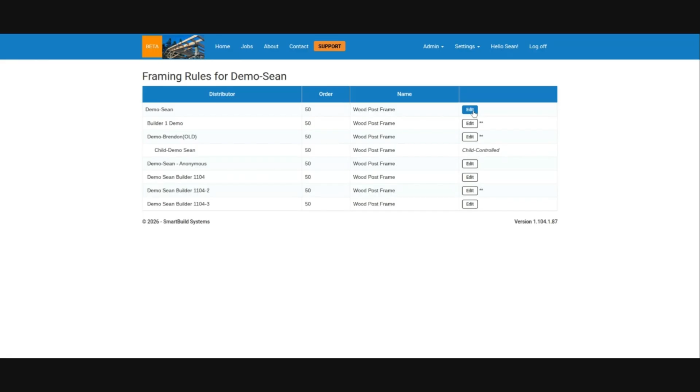In the meantime, we've also been doing quite a bit of changes on the software. I'm going to share my screen, and we are going to get into the new things that you'll be seeing. The first thing I'm going to do is jump into the framing rules. As usual, there is some setup that needs to be taken care of to take advantage of some of these things. In general, we try not to change things on you. If we add new things, you're going to have to opt into them for the most part. That is true of some new materials that we'll talk about as we get into a job.

But if you do want to take advantage of some of these things, you will have to come in and make some changes to your framing rules in the setup wizard. And if you need help with that, that's what our support is for. So just let us know.

One thing I did want to point out in the framing rules here, as we get into a job, you might have seen mentioned in the release notes that we've changed quite a bit with the attached buildings for porches, lean-tos and any sort of attached buildings. One of the things we've done is you can now have a different set of properties, materials and settings for the attached buildings that are different from your main building. We're going to get into a job, and it'll make more sense as we get into it.

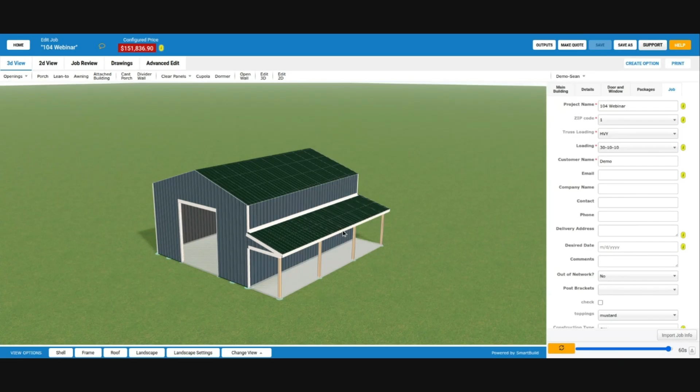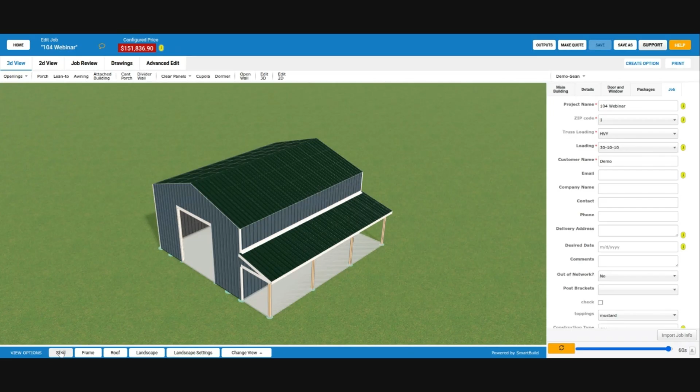So yeah, new functionality there. I'm going to run through a couple things here on the main building, and we're going to spend the bulk of our time looking at these new attached buildings and the porches. But a couple things I wanted to point out. Some of you may want to use this - it probably applies more to porches, but it's a little bit easier to show here.

You can now have gable trusses even if you're using rafters, so you can use a combination of gable trusses with rafters. I have trusses right now, as you can see, but if I switch over to the rafters, you'll see that it's going to switch my roof framing to rafters, and I have gable trusses. If you want to do this, there's just a checkbox here to actually get the gable trusses to stick around. So instead of the end rafters, which we also have, you can turn that on and use gables.

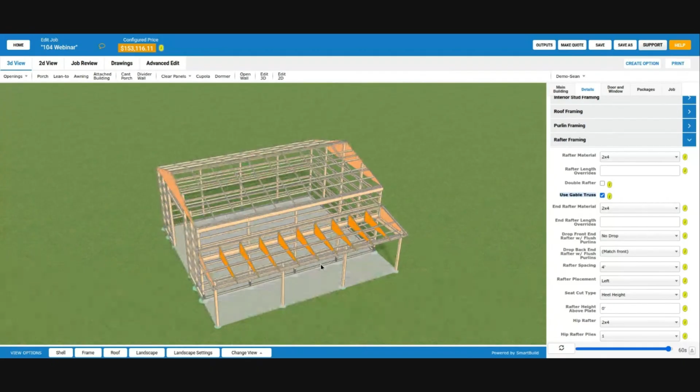Maybe more likely on the porches - so you can use rafters for your porches, though you could have these gable trusses on the ends. That is a setting you could have specifically for your attached buildings. In this case, I have that on my main building at this point. I'm going to switch this back. So just something to keep in mind, a new feature.

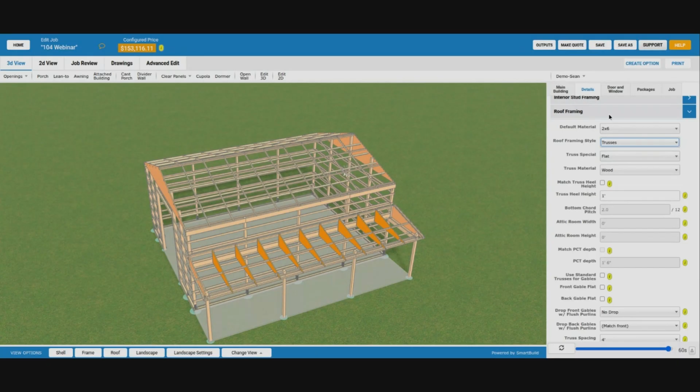Another thing I'll point out here on this main building is we've added an additional ledger. So we have the top ledger for porches, and now we also have a lower ledger. These are going to show up at the top and the bottom here. I do have these turned on. Anytime you have a porch coming up against a wall, or a mono truss porch, you have the ability to have this upper ledger, which we've already had, and now a lower ledger, which you can kind of see here - it's this one right here. That's going to be down here in some of this framing roof ledgers.

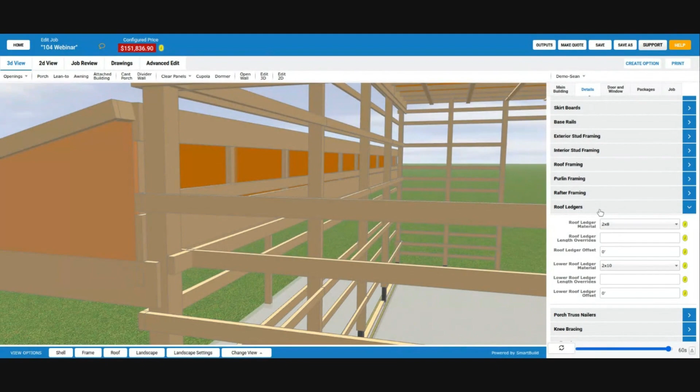We've switched things around a little bit here. We had some of this in the rafter framing. We do still have a bond plate - up here at the top you can have both a kind of header, or we're calling it a ledger, and you can also have a bond plate. So you can have two pieces up here at the top. The bond plate, the rafter bond plate, is still here underneath the rafter settings, and that's only available with rafters.

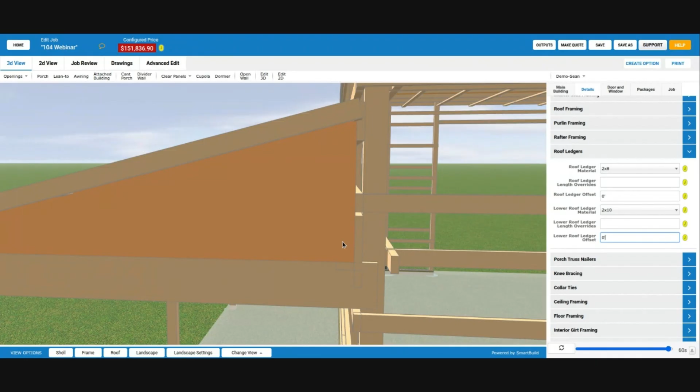But with trusses, there's a new section here of roof ledgers, and the roof ledger is going to be the upper - that's the 2x8 that you see here. Then we've added in this lower roof ledger - I have a 2x10 here. You can shift that; there's an offset. I have this at 0 at the bottom, so it's going to place it flush, I guess, with the bottom chord. Then it's going to place it up at the top here with the peak of that mono truss. You can shift those if you want, using this offset to move them up and down.

So new material, if you want to use that again, you'll have to go into the framing rules. It's going to be set up as none - you're not going to see any changes here unless you go in and add in some materials like I did. I went into my framing rules and added those materials, and then came into this job and added that in.

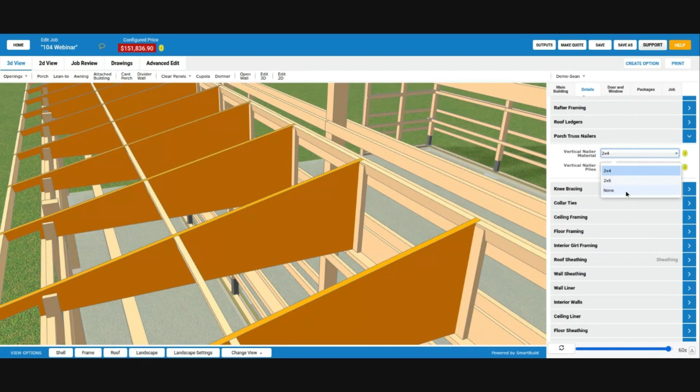Probably keep that set. In the same area, another new thing we've added is a new group called porch truss nailers, and the actual material is a vertical nailer material. So I have a 2x4 and 2x6. Again, this is going to come in as none, but that is going to be these parts right here.

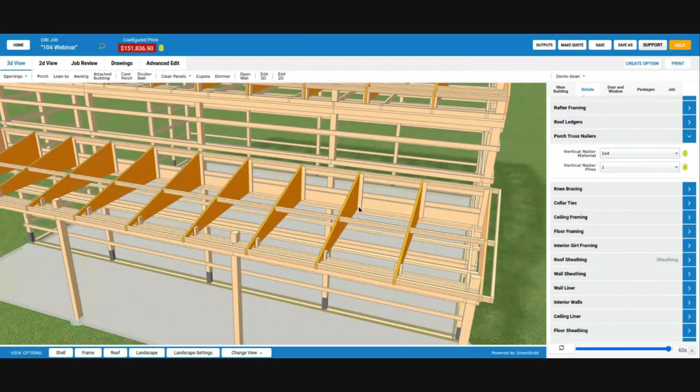Those are going to show up if you have this set to a material up against the truss here, in a porch situation like this, where it's meeting against another wall. This porch is up against this wall with these mono trusses. It's going to put in these nailers at the kind of tall vertical here on the inside of these. So new material, that's something you can add in here if you want, and you can put in 1, 2, or 3 plies, and that will stack coming out towards us here.

So another new material, new feature, and again, you will have to go and set those up in the framing rules. Just a little change here.

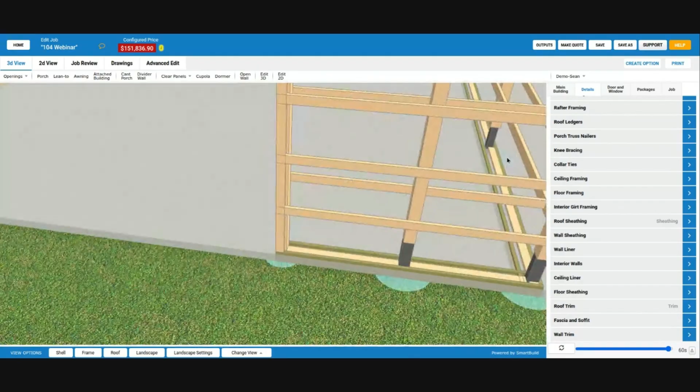This is not a new material. We've had what we call base rails, and I know some of you have been using these, and you can see those in between here. I have those turned on. I have a material in here for the base rail right here, 2x4, in between the posts. So base rails are always going to show up in between the posts.

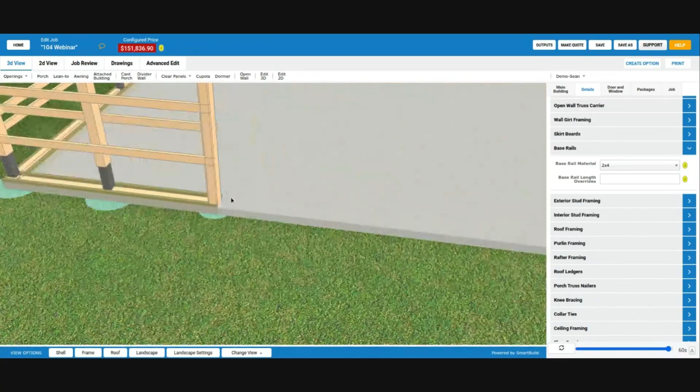The thing that we changed here is that we've removed those from overhead doors and sliders. We used to run these all the way through, but now we're just automatically getting rid of those. Hopefully that's not a problem. That's one of those things where this is just going to change on you. If you don't like that, let us know, and we can make some changes to make that an option. We decided to just remove those based on feedback that we heard. If that's a problem, let us know, but just heads up, you're no longer going to be getting the base rail if you're using those at the overhead door slider openings.

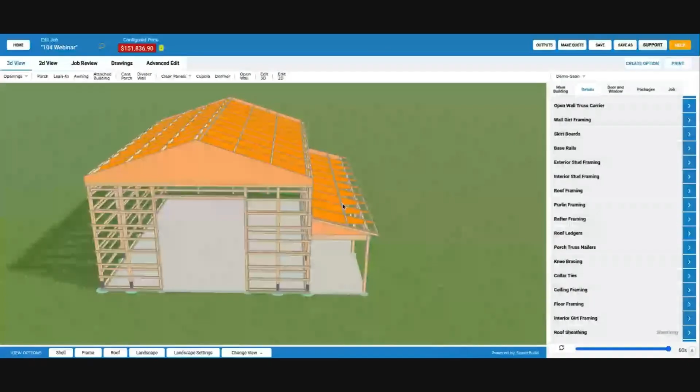I think one last change here before we get into the porches, and this one's kind of an advanced feature, but I did want to just point this out. I'm not going to get too deeply into this because we could probably spend an entire webinar on this.

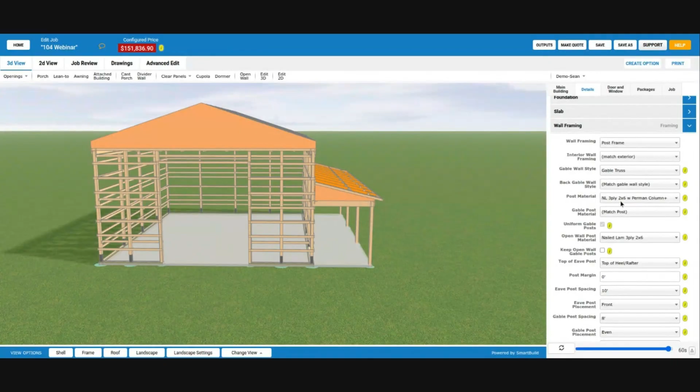And that is getting into a change with the assemblies, post assemblies. We have a whole other video on that. We can also set up a support session where we can walk you through how to set up assemblies. I do have an assembly set up for my posts. This plus here indicates that this is an assembly. And you can see I have a perma column, a 3-ply 2x6 with a perma column, and I do have this perma column showing up here in the 3D model.

And this is coming from a post assembly where you can do things like this. You can have a lower post, you can have an upper post. You can set up pretty much anything that you need for this post, from the connection with the roof all the way down to the connection to the earth and everything in between with the assemblies.

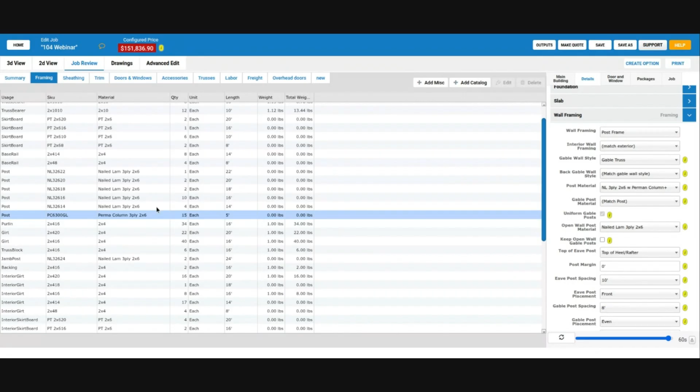And when I apply this post assembly, it applies the post. It also applies any other parts that I have associated with that post assembly. So here's a specific permacolumn type product that I'm calling out here that's coming along with it. And then any sort of accessories, and you can get into the foundations like the post base. This is all coming. I have some clips and some hold downs and things that are coming from this one assembly. So these are nice because you can set the post material to an assembly, and then all of this stuff comes along with it.

And you can set those up in the setup wizard, and again, we can help you set that up. And the other thing that you can do with these is you can run these through your span tables to where, based on span tables, it can pick specific assemblies. And those assemblies can also have different types of post base or different things that come in.

Based on the assembly, the assembly can also set up conditions to where I use this post base in this condition, and I use this other post base in this other condition. So it's kind of a complicated advanced feature. We can help you get these set up. It probably sounds a little confusing if you're not familiar with them. But for those of you using them, and if you do want to use these, one change that we've done here, and we're going to do some more work on these, is...

When you use these assemblies, you can set up your foundations as part of the assemblies, and then it just kind of ignores your foundation that you have for the job, and you get the foundation that you have set up specifically for the assembly.

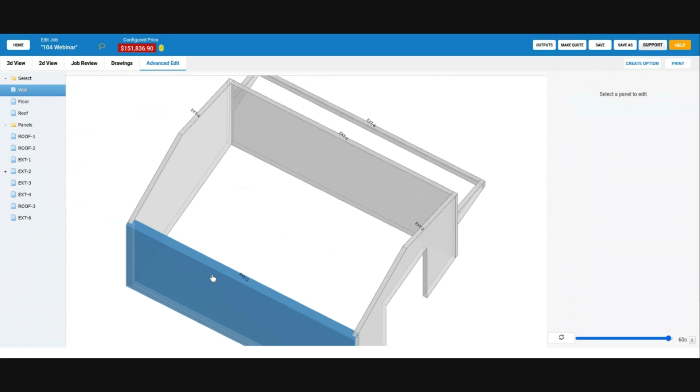For like an individual wall, for this particular wall, we'll say EXT3, I can come in here and go into that same foundation question. And for this wall, and you could also do this for the opening for like the jamb post, I'm going to change the answer to this question to a 16-inch cookie.

So this could be any of these different settings that you have here. This is just an example with the post base. And when I change that for just this one wall, it is now going to honor that. Before it wasn't honoring that for advanced edit. So now you can go into individual openings, you can go into individual walls, and make changes to these types of questions that are set up as conditions.

And now if we go into our job review... oh yeah, I'm in the right place here, but I clicked on that, so I'm going to go back here. So we still have our same post, we still have our permacolumn lower post, but then here in the post base, now we end up with 3 of these 16-inch cookies, or concrete post cookies. So that's the new thing, you can get into there and dig into individual walls through advanced edit, and it will honor those to give you the right things.

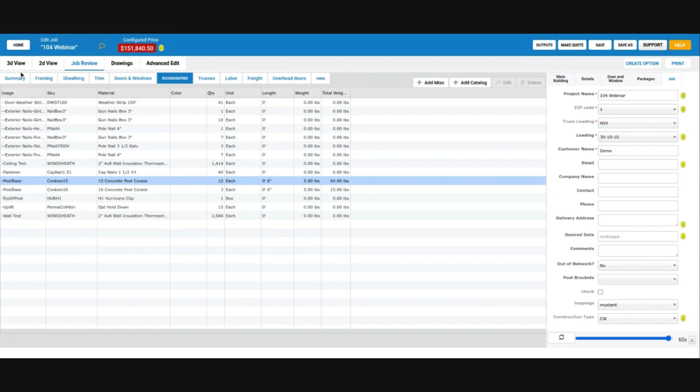And that again can also run through your span tables, and we can help you get those set up. That's pretty advanced right now, but those can be really powerful tools. We're going to continue to do some work on those coming up in the near future, but for now, that's where we're at with those.

Okay, now we're going to get into the bulk of the new things here with the porches. There's quite a bit going on here with this release, so I'm running through this pretty quickly. At the end of this, we'll open it up for questions. If you do have questions, we can get into more details, and we'll record this and post this, and also you can use our support line and we can help you set this up.

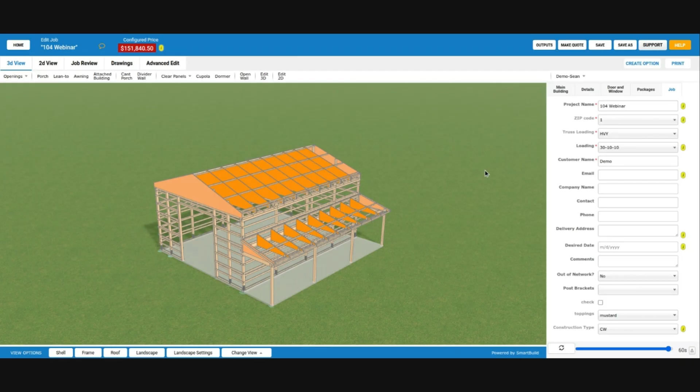Okay, so with these attached buildings, you're going to see these same buttons show up here, but there are quite a few changes related to this. So if I click on this porch, what you're used to seeing is it's going to pop up the input dialog for the porch, and you can go in and change things. If you read this, it's going to say click a wall to add a new porch.

And so the way that you initiate this command now is that you pick the wall that you want to use, or where you want to place this porch. So if we want to place it over here, it's going to get highlighted. And if I click on that, then we get our input dialog here. So that's going to be a change. That's going to look different, but there's some advantages to this. One, you can see we get a highlight here.

So you are going to see quite a bit of what you're actually changing here as you input it. I'll get into this gear here in a second. But one thing that is going to change as well is the way that these things are aligned is different.

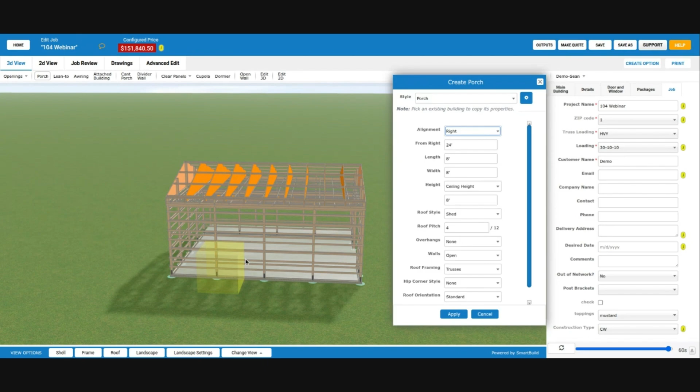Before, our default, and this isn't going to change in a sense, is left and 8 foot, just like this. But if you pull down this alignment, you can now input this based on from the left side of this wall or from the right side of this wall. And when I do right, you'll notice it says from right 24. It's not going to move the building on us in this case, but it is 24 feet from the right now.

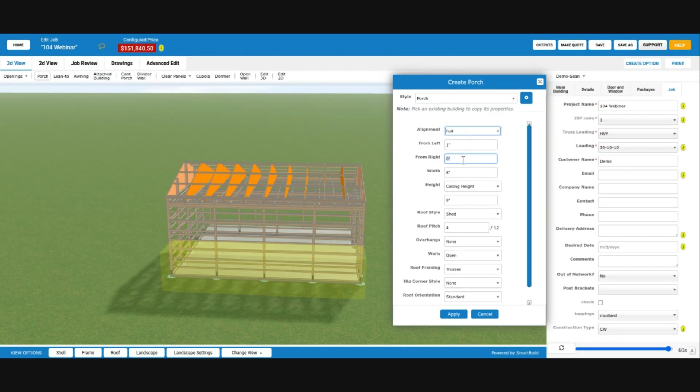You can also center this. Center will put you right in the center, so from center 0, and it's going to go 8 foot out from the center. And you can also do full. If you click on full, it automatically says 0 and 0 to give you a full length. And what's kind of nice about this, you can do like 1 foot from the left or 1 foot from the right, and that will pull it in 1 foot from the left and 1 foot from the right. Or if you do the 0 and the 0, that will give you that full length.

So that is a change, that's something that's going to be different. And like when we looked at those framing rules, there are going to be some different properties. Actually, when you open this up on Monday morning, everything's going to be the same outside of you have to click on the wall and this alignment. And some of it's going to be the same because these are just specific to attached buildings. So these you'll be used to seeing the height and the roof style and the roof pitch and the overhangs, all these things.

When you click on this advanced option, that's when you open this up, and I've already changed these like I showed you in the framing rules. So these are different for me. I've set these up the way that I want them, and I have the settings that I want to have available.

So we can start turning on things like ceiling here, specifically for this attached building. As we're changing these, this is for this attached building here, not the main building.

One really important point, something that's going to be different: anything that's in this attached building dialog, any of these settings you're setting here, are now going to be controlled by this porch. They're not going to be controlled by the main building.

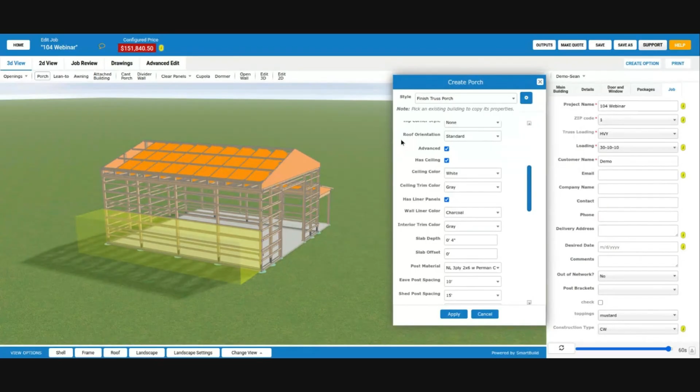A couple other things I wanted to point out. There's a note here that says pick an existing building to copy its properties.

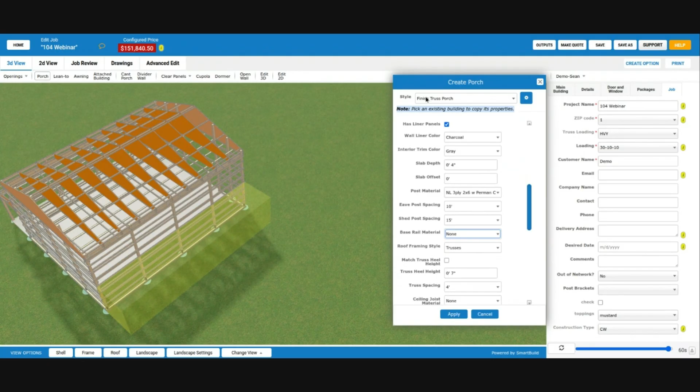At this stage, you don't necessarily have to use a style at all. You can just change any of these settings and hit apply, and whatever you set in here, it's just going to apply those. It doesn't have to be a style. Even if you're under a style, if you make changes and hit apply, it's going to apply whatever changes you have in here.

But the other kind of cool feature is if you have an existing porch with settings you want for this side, like the same thing on both sides, you can click on that existing porch and it's just going to use those same settings. You might notice it changed the ceiling height to 9 foot, so all the settings from this porch got applied over here. Even though I have a style, we could change to another style and it would change all these settings again, but right now it's using the settings I just clicked on.

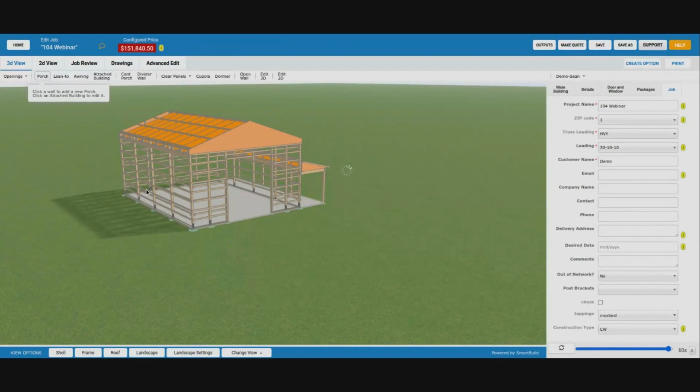If we like those, we can hit apply. So I'll hit apply, and it will actually apply this porch to that wall we clicked on. Now these two porches match exactly, except they're on different sides of the building.

One other thing I wanted to point out, since it is a bit of a change: I'm still underneath this porch command, so I can still click on a wall. The one thing we kind of lost here is the ability to do a wraparound porch easily. Before, we had quick buttons where you could click different parts on the wall, but that was actually confusing for a lot of people. Now, to do a wraparound porch, you do have to input two separate porches, but it's pretty easy because we can match the settings with this porch.

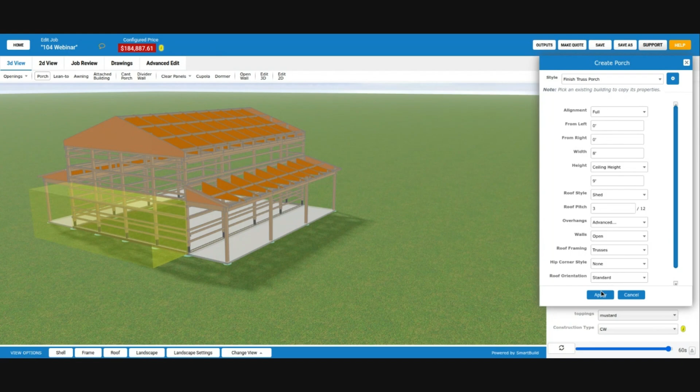I just clicked on that porch, and now these are going to line up, since that's full length and the same height, everything's the same here. If these meet at the corner, that's 0, and that was full length all the way to the end, and it's going to be the same thing over here. So we should get a wraparound on both sides now, and now we do get those wraparound porches on both sides.

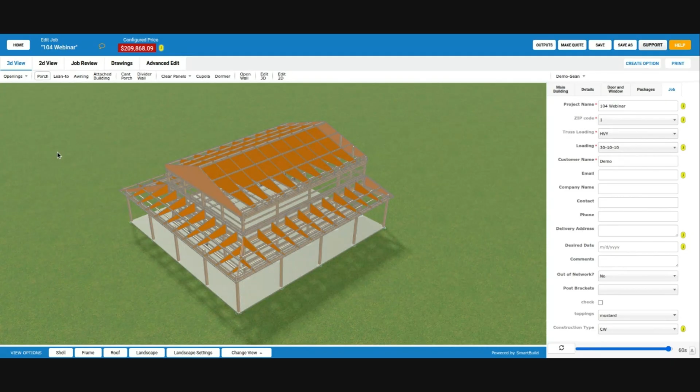Pretty easy though. You should be able to just match the properties of one porch that you put in. As long as that's starting at 0 and the other one's ending at the very end of the wall, however you do that, you should still be able to get those wraparound porches pretty easily, even though we don't have that button anymore that automatically handles it.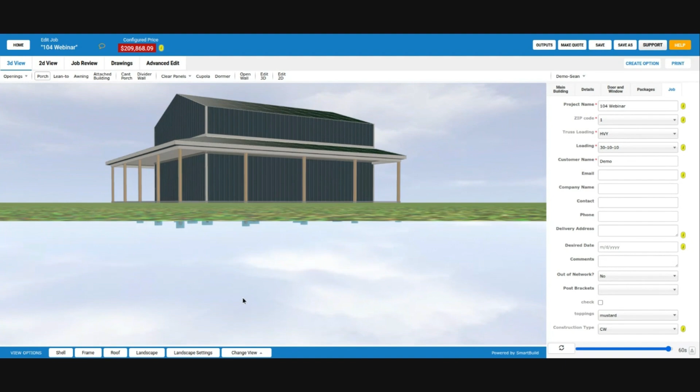Okay, I think that might be everything for the input of those. I might think of a couple other things, but I did want to point out these new parts we put in. One of those, and I'm going to get out of this now. If you hit escape, it'll take you out. Just FYI, I was still in that input method, so I hit escape, and now I don't have to worry about that.

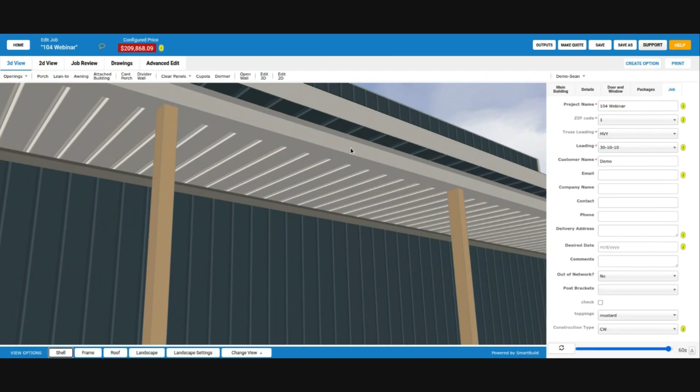Selecting walls, one of those pieces of trim we put in is beam wrap to soffit. That's a new piece of trim, and it comes into play on this front wall of this porch where I have beam wrap set up here. That was part of our settings that we looked at. There are no panels on this front part of this porch; it just runs, this beam wrap runs right into the soffit.

I had just a J channel piece set for that beam wrap to soffit trim. If you have a piece of trim in there and your beam wrap runs into your soffit with no wall type panels in between, you're going to automatically get this beam wrap trim, if it's not set to none, or beam wrap to soffit trim. So there's a piece coming in right there, and we'll go look at some drawings here in a second. It's a new piece of trim.

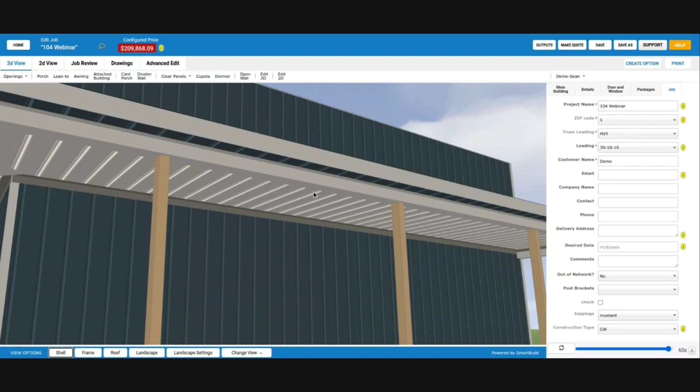If it doesn't meet up, that piece of trim is not going to be placed, even if you have a material set as part of that trim. It's going to give you that typical top of eave wall, open wall trim that we have now. But if you have a panel, it's going to give you what you typically get with the beam wrapped panel. If it's right up to that soffit, you're going to get this new piece of trim.

The other place here where we have a new piece of trim was the ceiling to wall trim. That's going to come in anywhere a ceiling meets a wall, so that's going to be all around here. Let's go into the drawings, into the ceiling layout, for a little bit easier view.

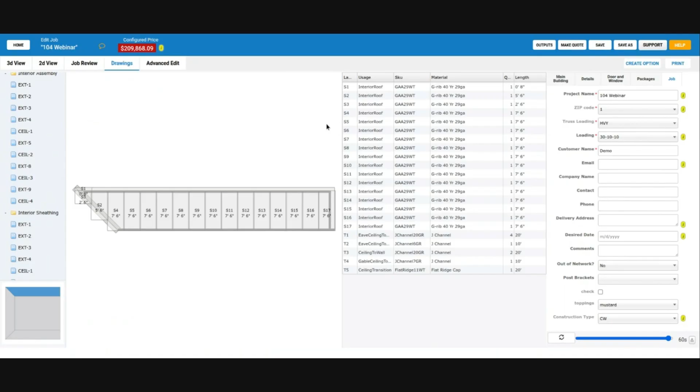Let's go into just this ceiling here, and if we look at the interior ceiling, there's the ceiling to wall trim. That's going to be oriented to this porch, up against this wall - we're looking at this from inside the building right now. So this new ceiling to wall trim comes in where this ceiling runs into that main building wall in this case, though this would also apply to any sort of porch on an attached building.

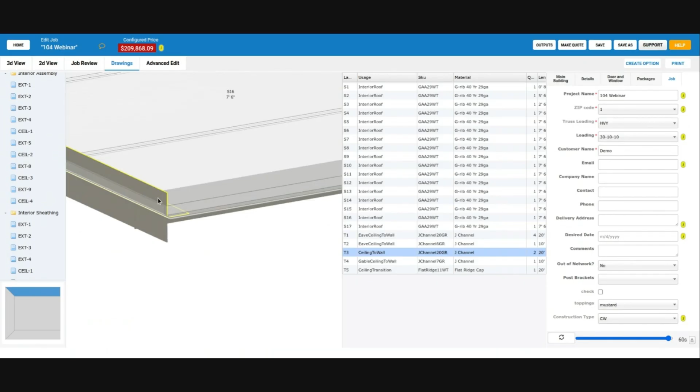You'll notice we also have this eave ceiling to wall trim - this is existing right now, you get this in this case. With this new ceiling to wall, this is an additional part here, right at the same connection. This lower one is kind of picking up the ceiling to the wall up above, and this is below - maybe this is just picking up the wall.

I think a lot of times people will use a single part here, like with the F and J, to pick these up. If you ever wanted to use two separate parts here, you now have the ability to use two different trim parts. That's basically what that gets at.

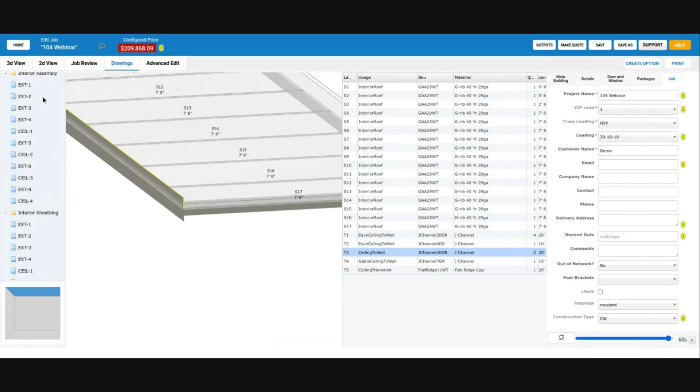This will come in set to none, this new ceiling to wall, and you're not going to see this if you don't use it. It's going to be the same as it was before. If you do want to use this, you'll have to go in there and set a material and set that up.

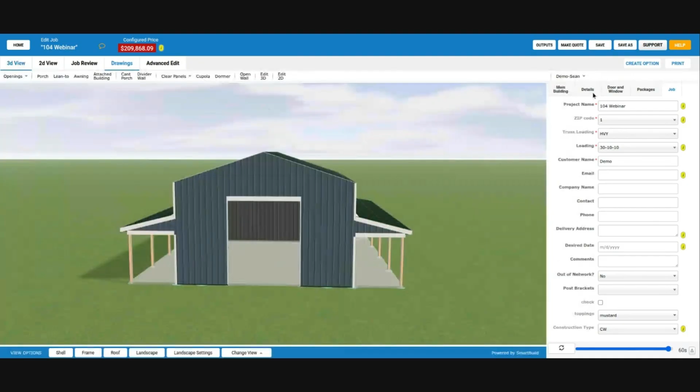This is an important thing here, and demonstrates something I mentioned earlier: this ceiling to wall trim was set up as part of this porch. So this is coming in because on that porch I selected a trim material for that and it wasn't set to none.

These same pieces of trim are going to be on your main building settings as well. So underneath these details, if we scroll down here, this is going to be part of the ceiling trim for the ceiling to wall. You'll notice this is set to none for the main building. Inside of here I also have some liner, some ceiling and wall liners, and there's not any ceiling to wall trim here.

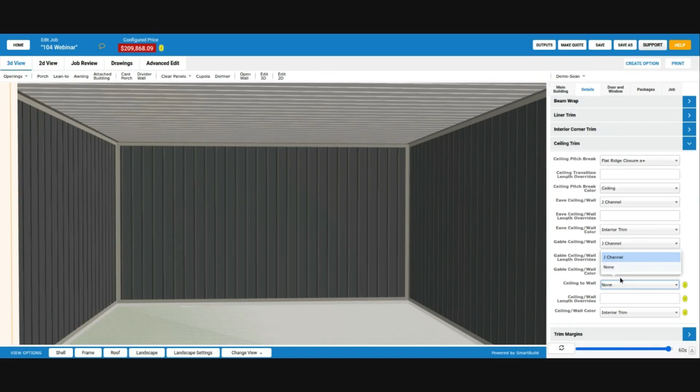If you want that to be there, you can come in here and set that to J channel. And because I have the ceiling to wall trim in my porch settings, these are completely independent - that's what I mentioned earlier, these aren't going to affect each other. So you don't have to use this ceiling to wall trim on the inside of the building, on your main building, but you can use it on part of your porch.

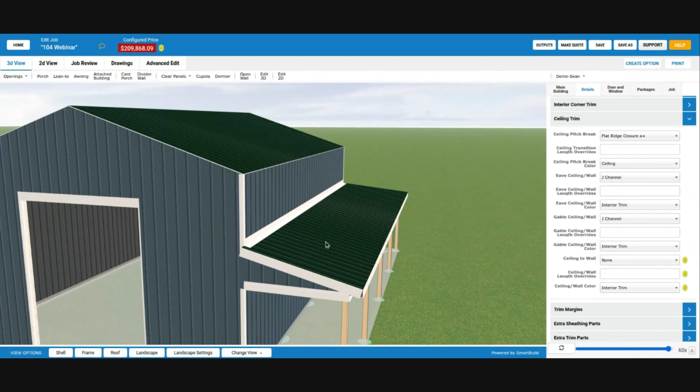If you do put in an attached gable type building - because we could put in a typical attached gable building as well - that attached building is going to have a separate ceiling to wall trim too, so that's something you'll have to watch. If you're putting in a separate building here, in my case, because I have ceiling to wall as part of my attached building in my porch settings, you're going to have to either set that to none or apply that separately from your main building settings. That's going to be true of all these types of settings, so that's going to be a change, or something to watch for.

Okay, I think that might be everything that I wanted to cover with you guys. So yeah.

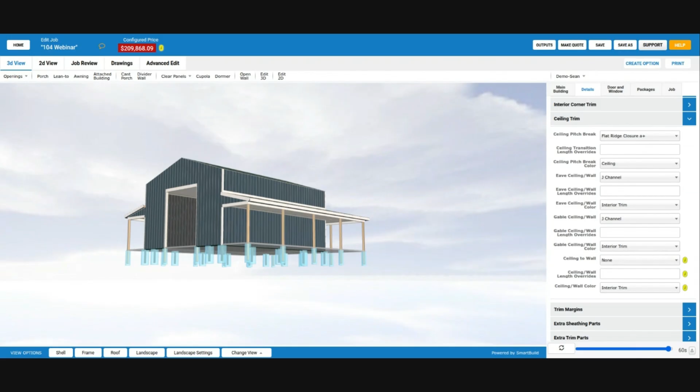Tyler did have a question about styles for attached buildings. He asked: styles of attached buildings will have the same advanced framing style options, and you can't select different options for different styles. I believe you can - you just have to turn on those options for whatever style you have. So if you want stud frame and your main building's post frame, I think that's what you're asking, Tyler. You can unmute if you want to join the discussion.

Yeah, so for the framing style, you would have to go into the framing rules and turn that on for it to show up.

I more so meant, will the fields be the same for every style of building? I get that you can change the selections within the field, but you can't have different fields per style of building, correct? That's correct - the fields you show in the settings, like Sean showed at the beginning, there's one checkbox that says show this in the advanced.

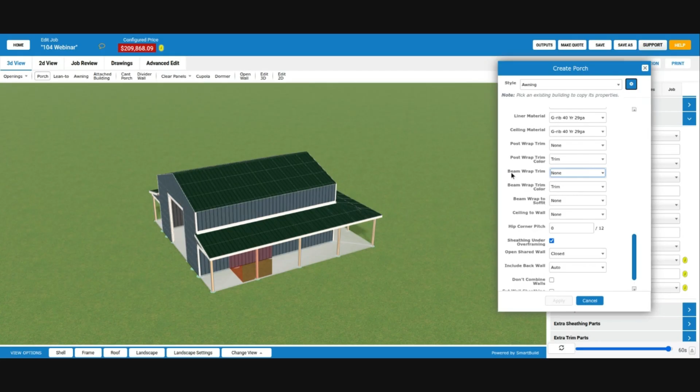And that was the same for this other porch. If you don't want beam wrap on your awning, you have to come in and set that to none. And then you can save that as your awning style, and it stays - but you can't have no beam wrap trim question answered differently for your awnings.

You can't hide that - these will follow the same hidden or not hidden settings in the framing rules, because you can hide different questions. There's advanced permissions where some people can see some of these questions and some may not see all of them - that's going to reflect in here too. Just something to keep in mind: if you don't have permission to see some settings, some users won't see those here either.

Second question real quick, if I may - when you save that style, can you save the non-advanced selections too, like a certain pitch for that style? Can you save those per style as well?

Yep, okay cool - the alignment from left, from right, width, length, height. So if you wanted alignment full as your default for porch, you can just change that to full and hit save, and that's now the default.

So theoretically, you could have a style that says full length lean-to, 2:12 pitch, or something like that? You could, yeah, exactly. You get pretty detailed, and we'll probably make it easier to organize some of these, but for now you're going to have a list - it'll be as long as you want, and you do have to get specific with the names if you want that kind of detail. But yeah, you can do that.

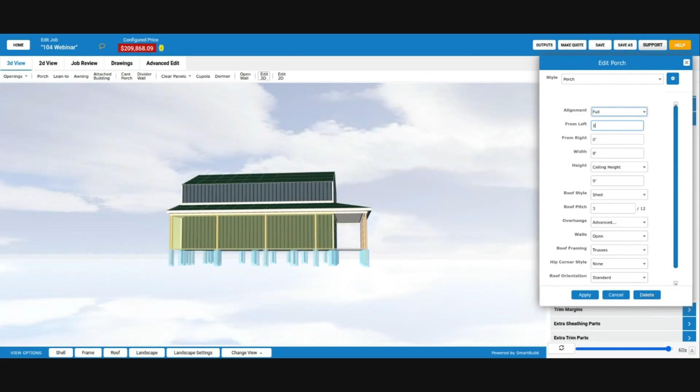There we go, there we go. You can always do this, right? Go ahead and apply.

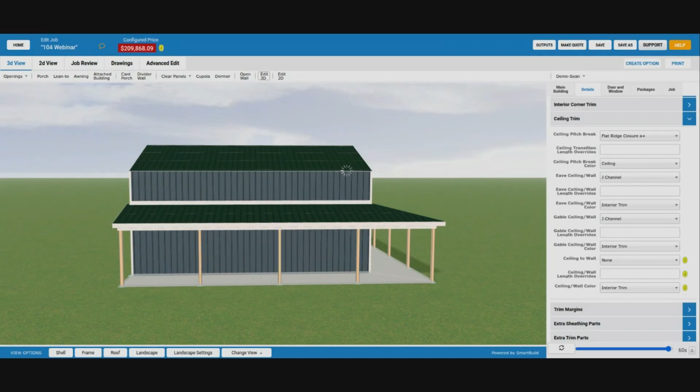But now is where you get to the fun part, because when you go to the other side and select the other porch, and make that from right 10 feet.

This is something that was really hard to do with the old way of doing things - instead of starting at the left, even from left 10 feet, I had to go from left 10 feet but then make the length 30 feet. We had to play all those calculation games to change all those things. Go ahead and apply it. But I'm seeing my preview here, it's running me all the way to the end.

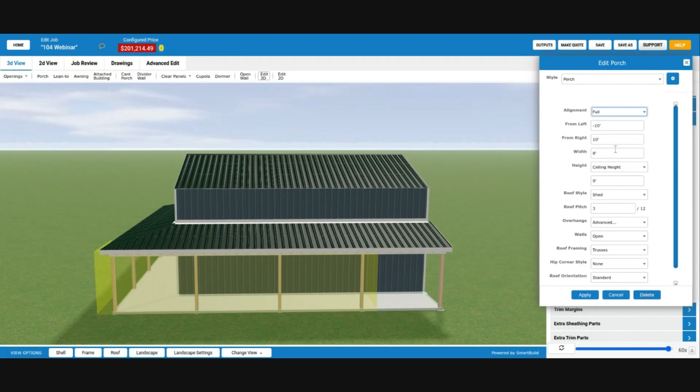Yeah, because you're doing right. No, make it full from right 10. Oh my gosh, I'm feeling stupid. Oh, but now I kept my other side. Yeah, make it from left 0. 0. Yeah, from right 10. Hey, there. Yeah, all right. There we go. And that's where the preview really is handy. So go ahead and apply that. Yep.

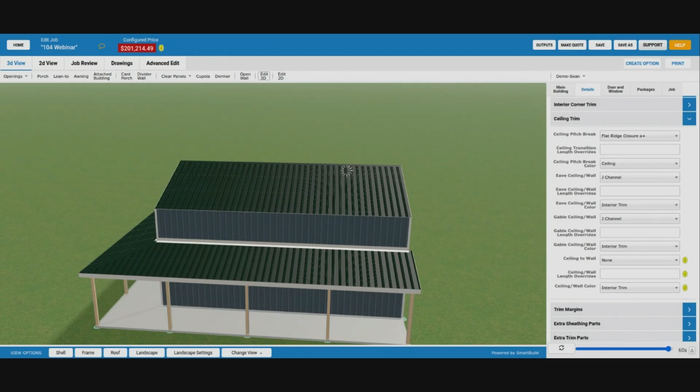So that's much easier. The other thing that is much nicer, in my opinion, and I hope it takes a little getting used to. I'll just say that. Yeah, it is different. It's a little bit. Go to your main building now.

Go to the main building and change it from a 30 by 40 to a 40 by 50. And then watch what happens.

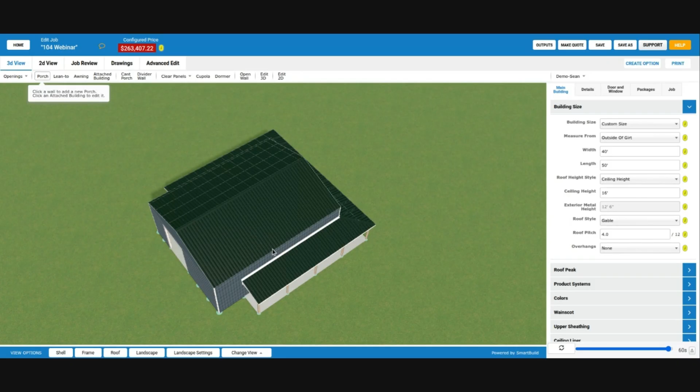While we're waiting for that to refresh, Star Home Design asked: do the styles carry over between jobs, or are they specific to each job? They're not specific to the job. You are saving these settings. Think of it as you're changing the framing rules. Yeah, that's a great question. I did want to point that out. When you come into this mode here where you're saving these things, that is not just for this job. When you apply and place this porch, that is for this job. But any of these configuration kind of things, this is all across the board. Those are going to stay for every job. So yeah, that's a great question.

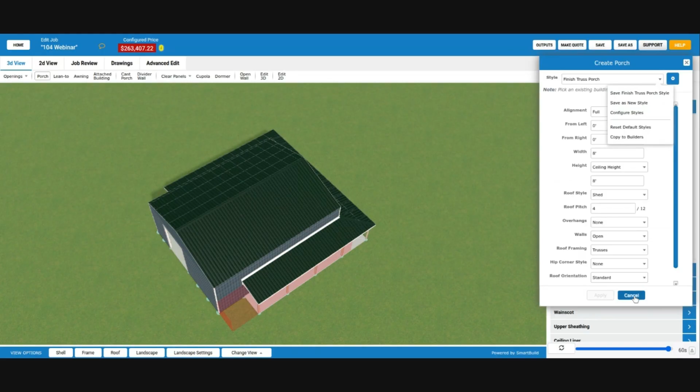Okay, another thing while you're in there, because you didn't touch on this: go ahead and click on that wall to add a porch. You'll notice that the apply button is grayed out. Yeah, and the reason it's grayed out is because if you put a porch in there, it would interfere with a porch that's already there.

So if you change that, go to alignment left and make it 0 and 8. 0. Yep. And 8. You can put it there. Now the apply button is available. But if you made it 0 and 12, it grays out and turns red instead of yellow. So that's what's going on there as you're trying to do it.

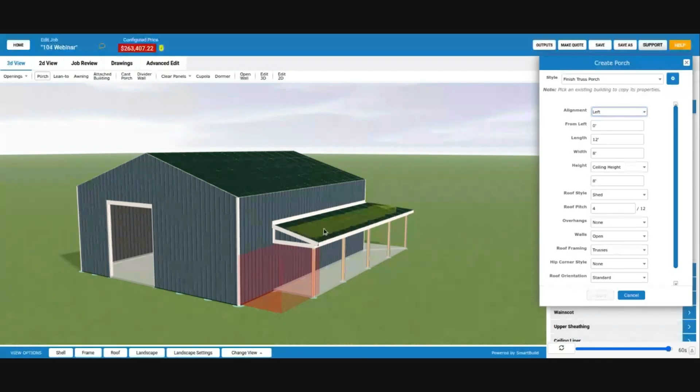In the old way, if you tried to click on a wall, it would say no, you can't put it there, there's already one there. Yeah, good feedback. Let's see what's going on.

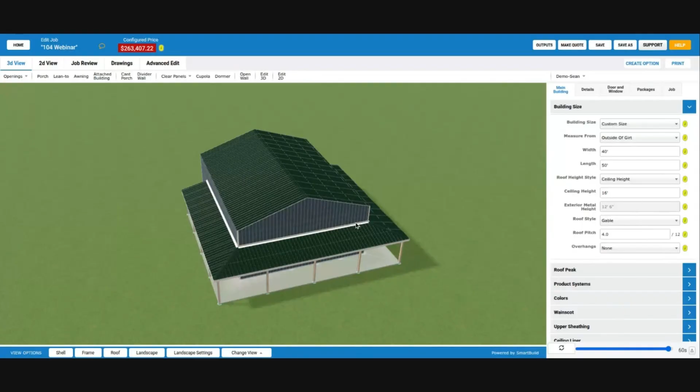So, but you notice when we changed the size of that building, it just magically left everything working correctly. The porch across the back there is still full length because we said 0 and 0. These other porches start at 0 and go full length. I could also, if I go ahead and edit that one, yeah.

If you change this, the other thing I want to touch on is this behavior here. If you change this from full to left or right, it's going to say, well, that porch is from right 0 with a length of 40. So 0 from the right side here, and it's coming across 40. If you change it to left, then it's from left 10 feet with a length of 40. 10 and 40. And if you change it back to full, it's going to be from left 10 and from right 0. And if you change it to center, it's going to give you from center 5 with a length of 40. So once you have a porch in there, changing the alignment won't change where the porch is placed. It's just going to change how you measure those things.

Hopefully the intent, as Tyler says, is that it's a lot nicer to make adjustments. That's what we were aiming for, to make it easier to make those kinds of adjustments on the fly. This is a little subtlety that sort of is us trying to read your minds. So anything as you're using this, if there's something that just feels a little bit backwards or frustrating, feel free to bring it up, reach out to support and just say, hey, I keep tripping over this, because we do want to make this as easy as possible for you guys to use.

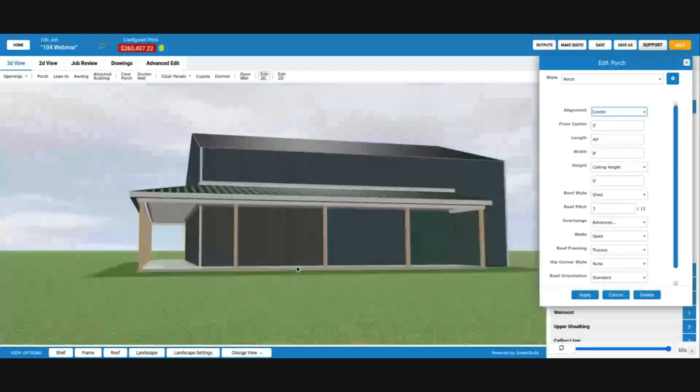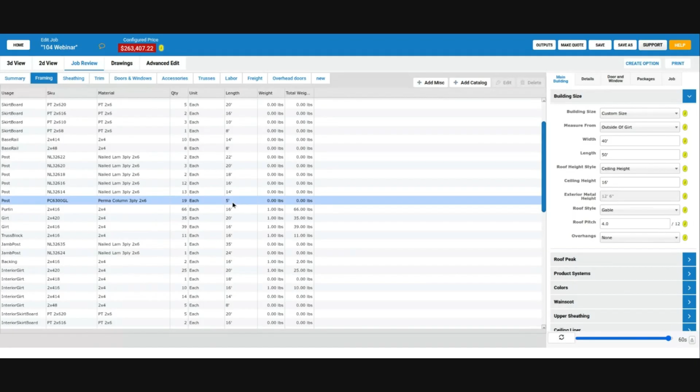So Mike Petra had a question: will the permacolumn assembly automatically take off, say, 5 foot or 7 foot from the post length? So you've got your permacolumns in here. I believe, yes. And the answer is if you look at the post, it is taking off whatever that distance is on the bottom of that post. I think I have these at 5 foot. It should be 5 foot permacolumns, and then those 13 posts are 14 feet long, instead of the 19 feet they would be if they were full length. Right.

So those are 14 foot posts and then a 5 foot permacolumn at the bottom. Does that make sense, Mike?

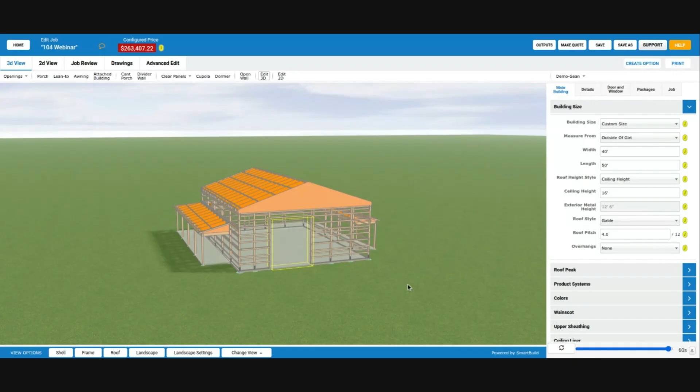Delmar asked, can we get these settings for windows? Which setting? I lost track of what we were talking about. Left, right, center, full. What settings are you talking about there, Delmar? You can unmute yourself if you want. I like the way the porch settings work, and sometimes when you're doing a print, windows can be hard to figure out as far as where they need to be placed.

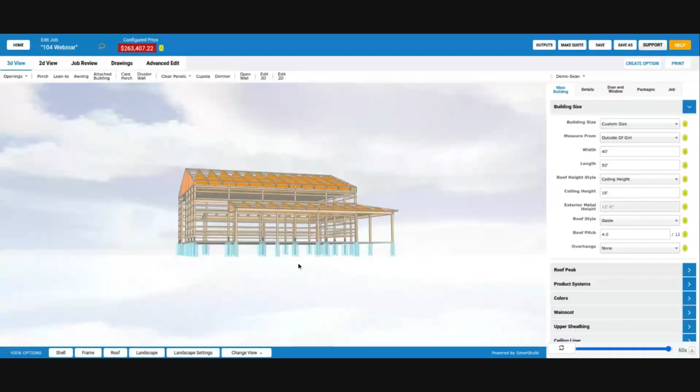Once you get it all figured out, they change the size of the building on you, and at that point all your windows move. So the way the porch stayed put would be nice in windows as well. Okay, so the windows will do the same thing. If you notice that the door that's on the end of this building, we changed the width of the building.

But if you click on that door, that is from center minus 5 feet. If you change that to from left... let's see here, so I probably had that from center 0. It kept the door in the same place when we changed the size. It shouldn't have. It should have kept it from center 0, because you said from center 0.

So, right, the way this is supposed to work, Delmar, is - and if it isn't, we need to fix it - but if you put this door in from left 10 feet, then it's always going to be from left 10 feet, no matter what you do with the size of the building. If you put it in from right 10 feet, then it should stay 10 feet from the right end of that wall, no matter what you change the size of the building to. And if you said from center 0, then it should stay in that location as you change the size of the building. That's how it's supposed to work.

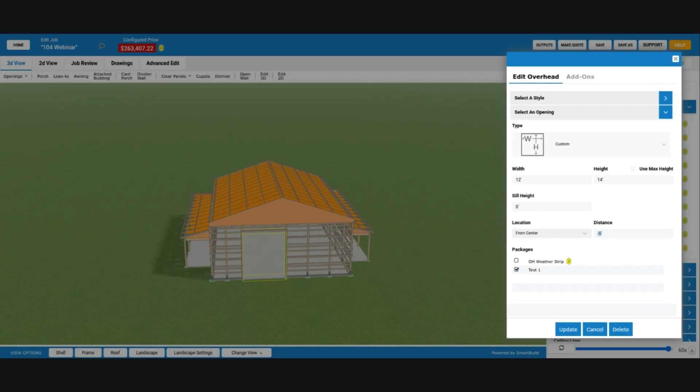What we don't have is a way to put in windows spaced evenly, right? Which I think is kind of the use case for that. I think it's probably worth looking at a couple of use cases, Delmar, to just say, look, when I put these in and then I changed the size of the building, it did this. I wish it would have done that. I'd love to look at some of those examples, because we try and make things up in our heads as we're planning this stuff out. And that's based on, in this case, it's based on stuff we've seen people do. So it makes sense.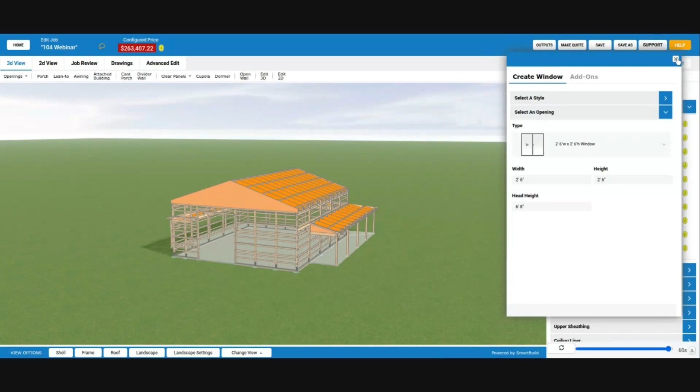So Megan says that's not how doors and windows work. That's what's being requested. It keeps the door relative to the access plane of the building, not the location. So what you're saying, Megan, is what Delmar reported, I think, and what we just saw here - it doesn't matter how you put it in. When you change the size of the building, it keeps it there. So it's almost like it converts it to from left and then leaves it there.

Okay, so it sounds like the consensus is everyone would prefer that if I put in this door, and if I put this in as from right 5 feet, then change the size of the building, it should keep it 5 feet from the right. It sounds like that's not what's happening.

Go ahead and edit that one, would you, Sean? Let's just see if you make it from right. Right now it's from right 19 feet. So change that to from right 9 feet, just so we have a little bit more wiggle room, and then update. And then we're going to change the width of the building from 40 feet to 30 feet.

So that is from right 9 feet, and that should still be from right 9 feet when we're done. So go ahead and change the 30. Yeah, change the 40 to 30.

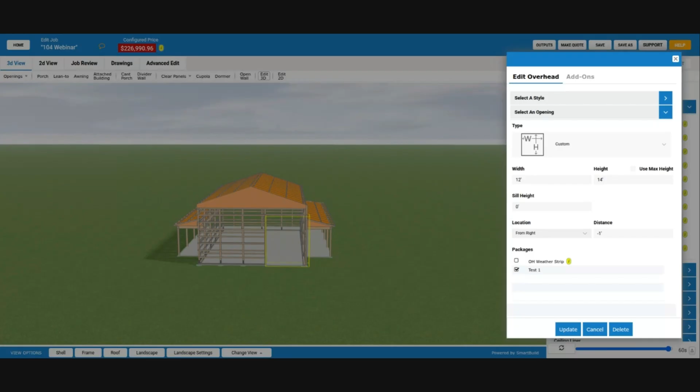Let's get that captured. Star brought up another issue, and I apologize, we're rushing a little bit here, but I know it was asked a while ago. Maybe I missed it. Has there been any change on being able to print out the plans to scale on different size sheets of paper?

No, but it is on the list. So we are going to be looking for that. The idea is you'd want to be able to say, I want an output and specify the paper size in the output. And then specify the scale, or have the program automatically figure out which of the common architectural scales would fit.

It needs a lot of discussion about it in order to be able to do it, but we certainly can do that. We just need to figure out what it is that we need to do to read your mind about it. But the basic idea is, I want to be able to print it out on a C-size sheet of paper and have it be to 1/4 inch equals 1 foot scale kind of thing.

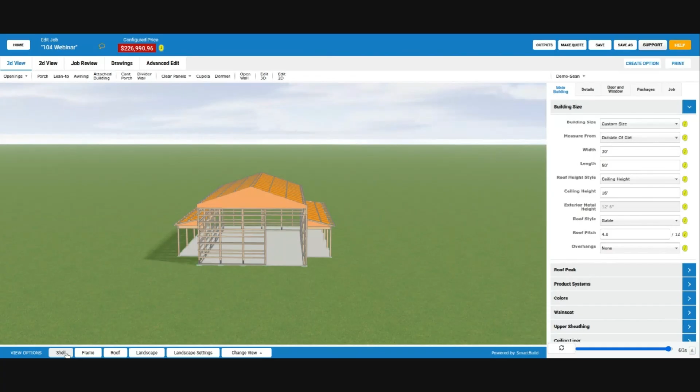Not yet, but that is something that we are looking at being able to support. And the way we would do that would be like, let's say if you were to go in and put a room in here, a couple of walls, interior walls in this building. Yeah, go in, interior walls, add a room.

Then you would be able to, with support that we're looking at for things called rooms, go in and say, okay, in this little room that you just created here, I don't want any sheathing, but the rest of this floor is a different room, and I want interior sheathing on that. So that first 10 feet wouldn't have any interior sheathing, and then the rest of it would.

Even to the point where you could just put in a wall that isn't really a wall - it's just there to divide a room. Yeah, this is actually coming up sooner than later. This is kind of next on the list, actually.

So that one we are working on, and it's going to be part of what Mark called rooms. That one is actually kind of first on the list, even before the timber trusses and before the stairs and platform framing. Doing these rooms also includes the ability to kind of set up a fake room, but it allows you to define that in this portion there is no liner, but then it starts here.

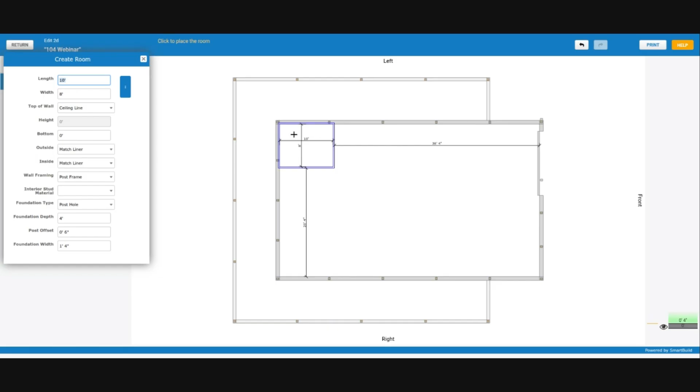So that's the general idea, to give you that kind of flexibility - using a different material per room, different slab depth, different material. One of the things that we know we're going to have to address is a different ceiling profile.

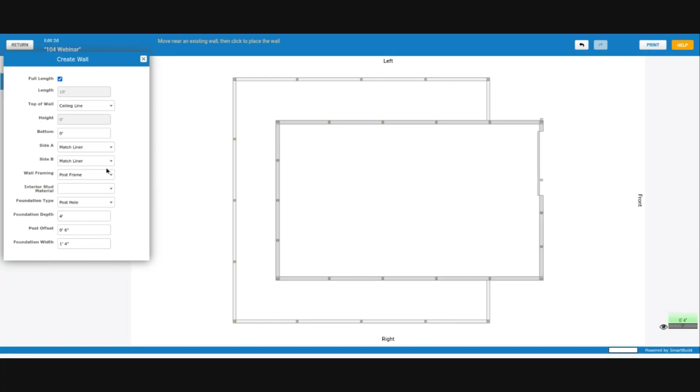So ceiling, whether or not you have ceiling liner, you would be able to control per room—ceiling liner in this room, no ceiling liner in that room. But to say this room has a scissor truss and this room is a flat ceiling, that we can't do just yet. We're struggling with how that would work, because if you have a lot of rooms with different ceilings, the bottom chord of your truss is jumping all over the place, and that doesn't fit with how we do the truss table. So those are some of the details.

Certainly different slab depth, presence of slab, all of those things could be different on one side of that foundation and on the other.

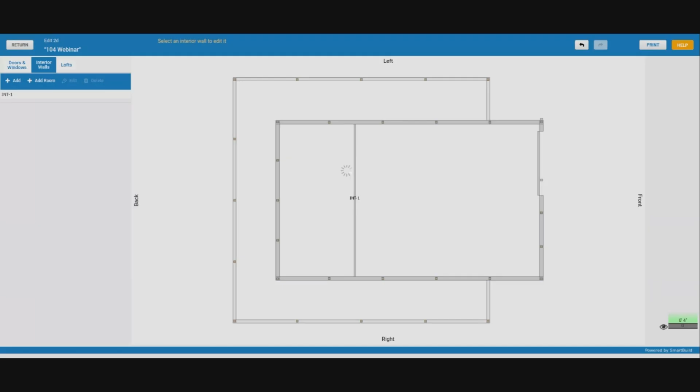All right, so we will be showing that off in a future webinar. I think two releases from now, I can say with some confidence—not the next one, but the one after that—I can say after this release we will be back to releasing on Wednesday nights, so you'll have new versions on Thursday. I can say with confidence that functionality will show up on a Thursday.

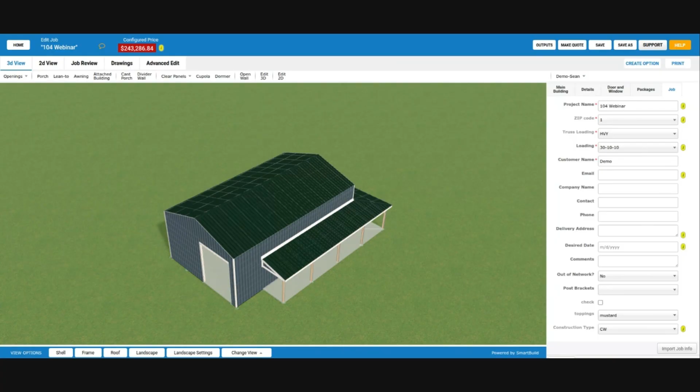Yeah, again this release was very, very different. There was a significant change, as Sean alluded to at the beginning. We had to rip out the whole foundation and replace it with a new one, and that's why we're doing this release over a weekend and shutting the site down. There's a lot of construction going on to get this thing set up and working under the new foundation. But once we do that, future releases will be back to our normal schedule of releasing on Wednesday night with a new version on Thursday.

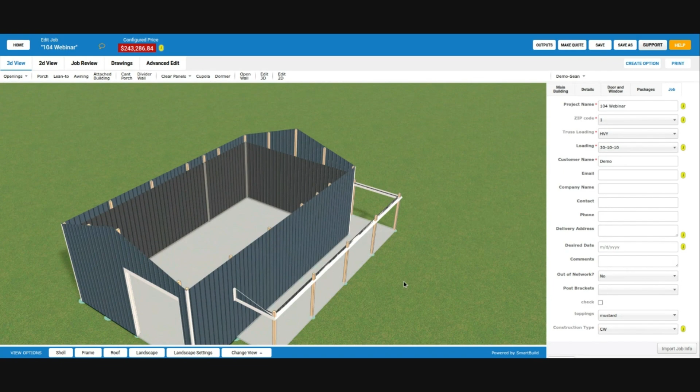Eric Hall asked, would an option to edit an individual truss or even a post be an easy way to do that? Yeah, this is a problem because the posts don't exist. That post right there—there is no post there. There's posts in this wall that are spaced at this spacing, but there is no post there. So it gets a little bit hairy being able to edit an individual post or an individual truss.

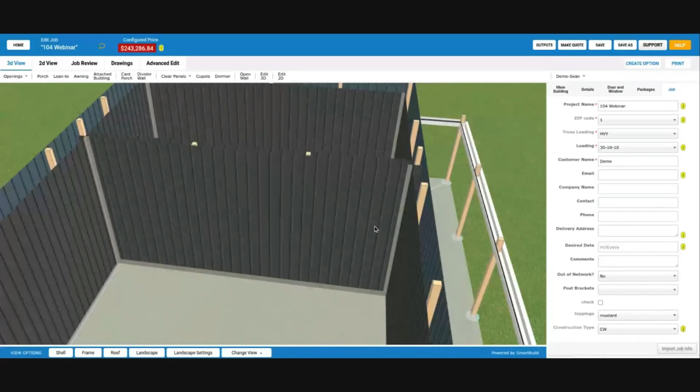And that really wouldn't help the scenario I was alluding to, because with this dividing wall, you could easily say on the back side there's scissor trusses and on the front side they're flat, or vice versa. Or even on the back side of the wall it's trusses, and on the front side it's rafters.

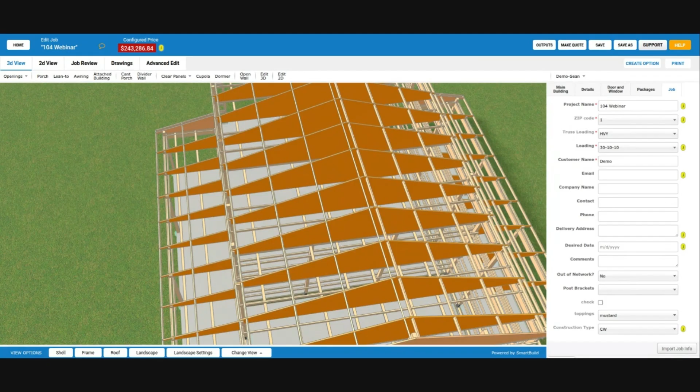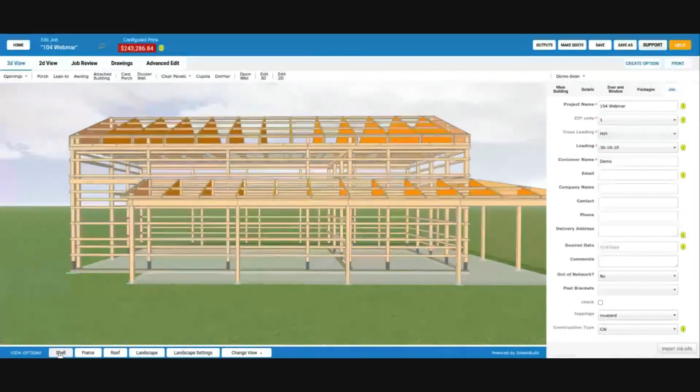We could allow you to do that. It's when you put in a couple of rooms—you've got a kitchen over here, next to that a pantry, and then a dining room. In the dining room there's a cathedral ceiling, and in the kitchen a flat ceiling, which winds up with a single truss that goes flat, then up, then drops back down again. That is what we wouldn't be able to do without a significant change to how we do trusses. But allowing you to change the roof framing on a room by room basis will work as long as the room is the full width of the building. So we could do that.

But initially we're concentrating on the stuff that can change on a building on a room by room basis—so it's primarily the ceiling liner, wall liner, and floor.

And that could be none—could be none, yes. Yeah, there's a bunch of stuff that just doesn't make sense, like this room is post frame and that room is stud frame. Well, the rooms are right next to each other, so is that wall between them a stud frame or post frame wall?